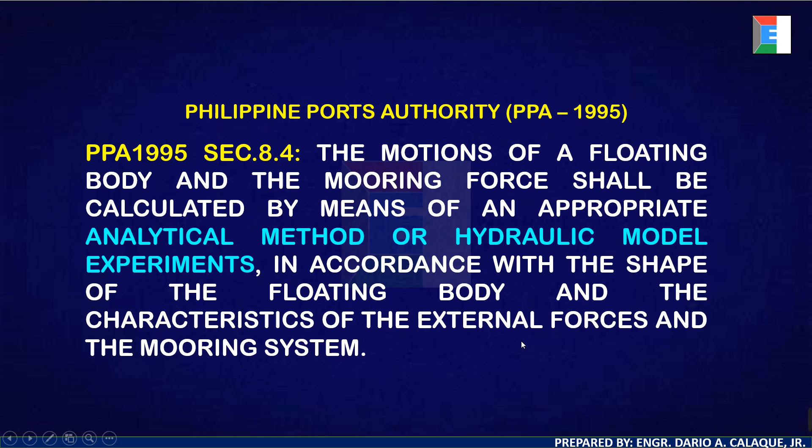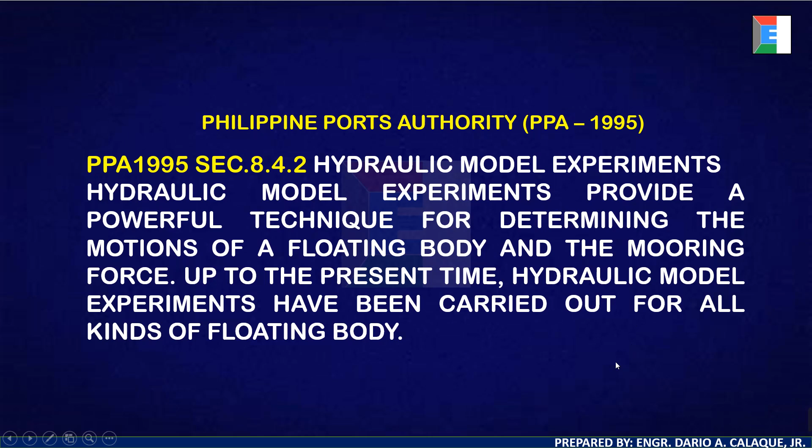Under section 8.4.2, hydraulic model experiments provide a powerful technique for determining the motions of a floating body and the mooring force. Up to the present time, hydraulic model experiments have been carried out for all kinds of floating bodies.

Under section 8.4, if we continue with the paragraph, we can read that the floating body is assumed to be a rigid body. Its motions are comprised of six components shown in figure 8.4.1, namely surging, swaying, heaving, pitching, rolling, and yawing.

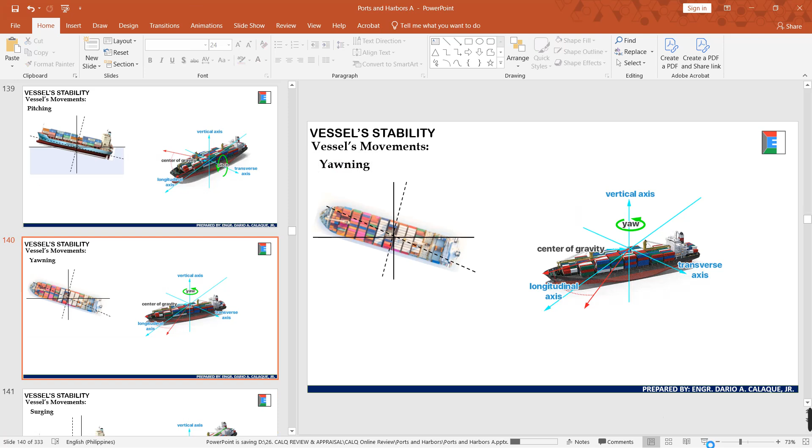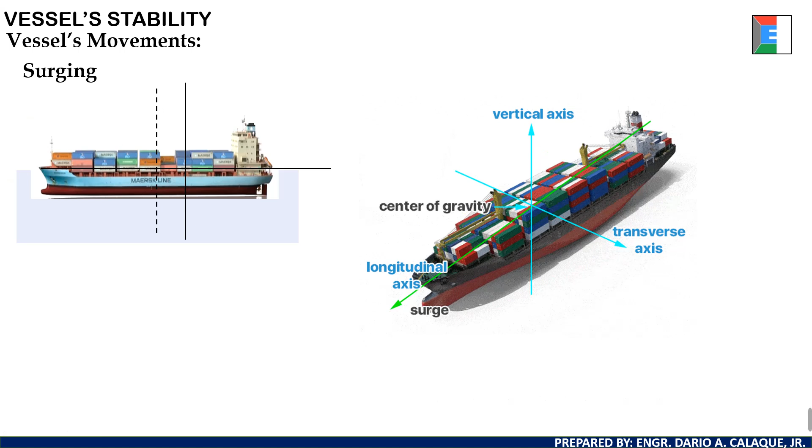So this is yawing - we have the yaw along the vertical axis. Surging is back and forth. Sway is displacement along the transverse axis. Then heaving and dipping is like up and down - dip is going down, heave is going up. That is heaving and dipping.

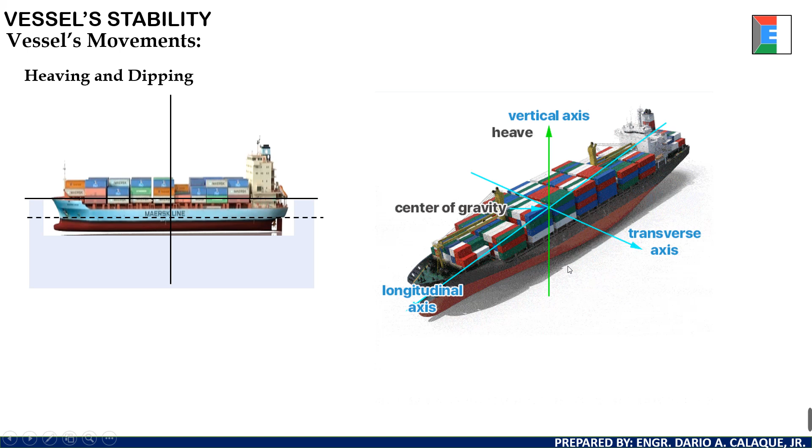So that's about vessel movement.

Now let's discuss the anchorage and mooring.

We have what we call the bollard. The bollard is the mooring fitting for mooring ships during a storm, installed at the outside or inside of the berth far from the waterline. So we call that one a bollard.

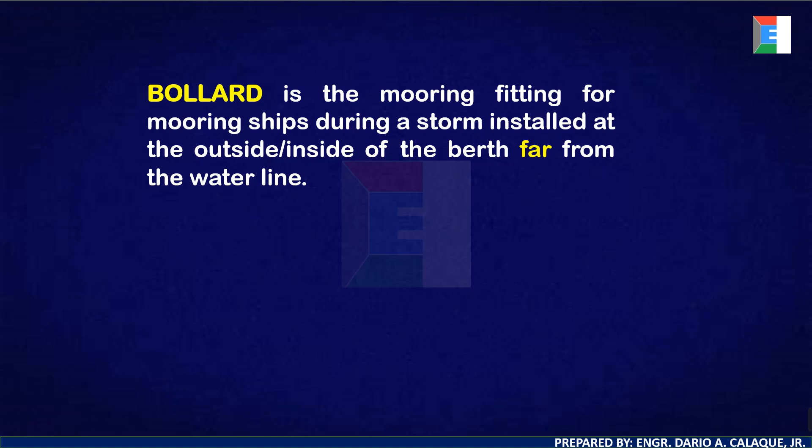The bitt is installed close to the waterline of the berth to be used for mooring ships in ordinary conditions. The bollard is medium-large because it's for storms, while the bitt is just for ordinary conditions.

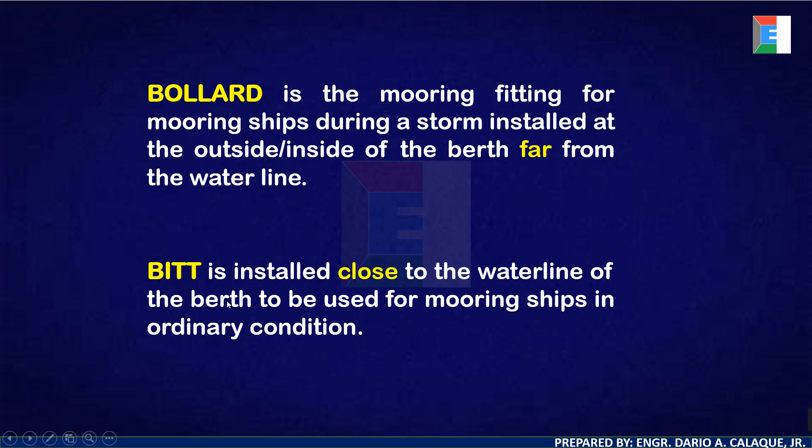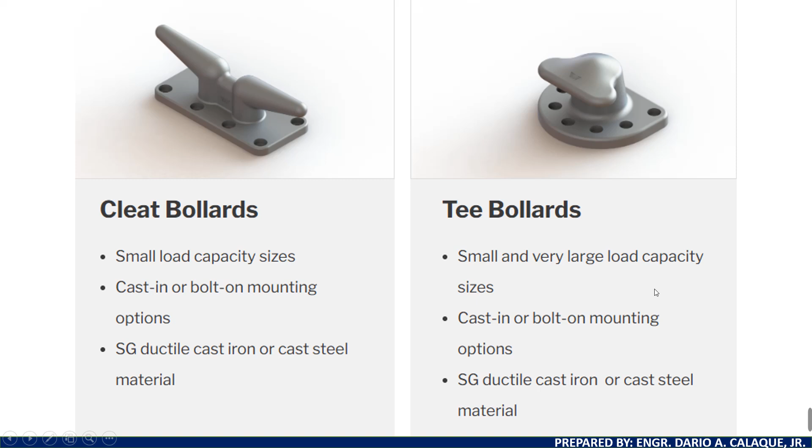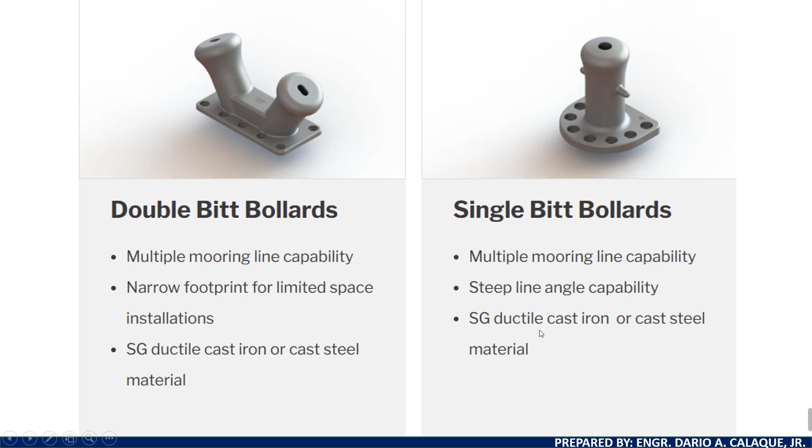This is the single bitt - it still has multiple mooring line capability, with steep line angle capability, again ductile cast iron or cast steel material.

We also have the horn bollard, pillar bollard, and kidney bollards.

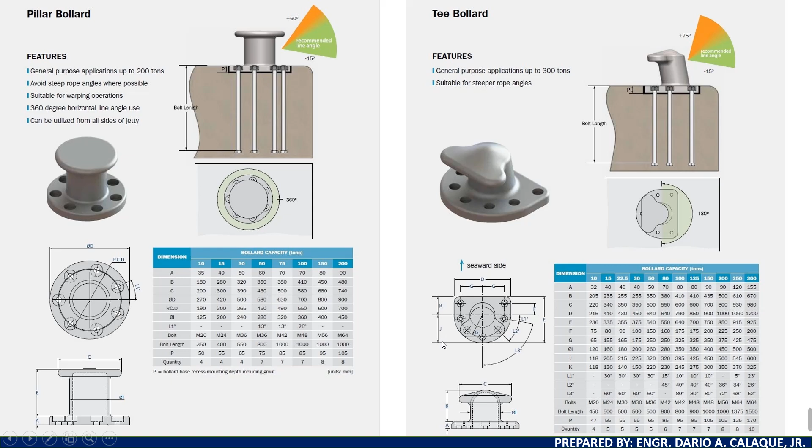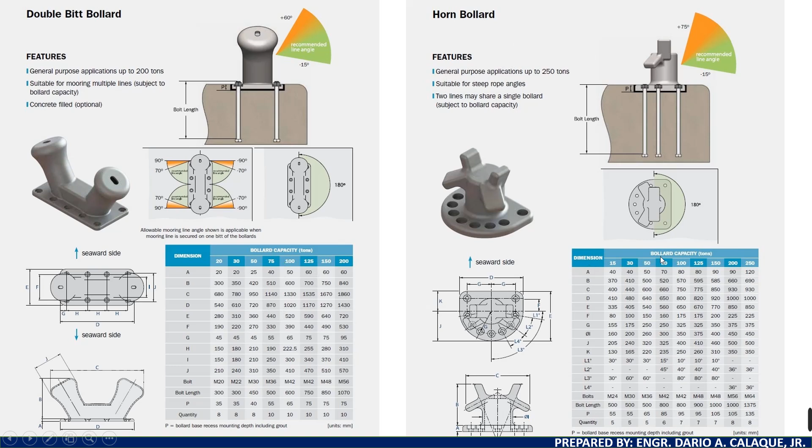We also have marine bollards that are a simple and cost-effective way to achieve mooring requirements. It is the anchor point for mooring lines to be fixed, in order to safely secure vessels alongside jetties, quays, berths, wharves, and dolphins in ports and harbors.

Mooring bollards should be selected in consideration of the mooring pattern, changes in draft due to loading and discharge, wind and current forces, swell, wave and tidal forces, mooring line types, size and angles, and ice forces where relevant.

We have ductile iron, cast steel, and stainless steel as some of the main materials used to make marine bollards. Generally, the design of the bollard should have a thicker diameter at the top, or the head or tip of the structure, to make it harder for mooring lines to escape accidentally.

It is important to provide a solid anchor point for mooring ropes. Certain designs have double bollards for ropes to be cross-fastened, and such an arrangement would provide a tighter connection.